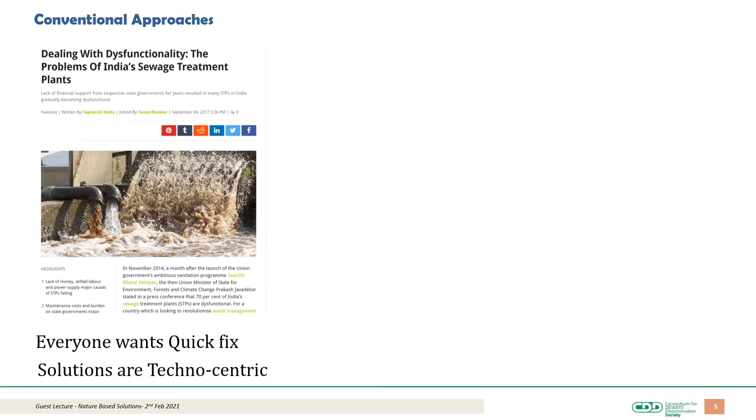In most cases across India and the world, everyone wants a quick fix, which means the solutions are technocentric. When you have solutions that are technocentric, there's a problem of the operation and maintenance being high, which people can't afford. That's a major reason why there are a lot of sewage treatment plants in India that have operational issues and sometimes are not functional at all.

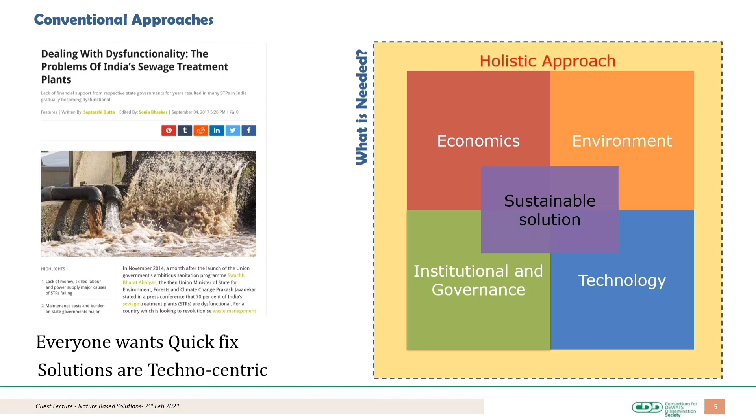So what is actually needed is a sustainable solution with a holistic approach that focuses on economics, environment, institutions and governance, and technology. So this is how we try to approach a program.

Traditionally, gray or hard infrastructure, which means engineering projects that use concrete and steel, has dominated the efforts to reduce and manage impacts from natural disasters and to manage water resources. However, internationally, the focus is now shifting towards nature-based solutions, especially for water resource management, disaster risk reduction, as well as climate change adaptation.

Natural systems have long provided many of the services communities seek from grey infrastructure. NBS, which we call nature-based solutions or nature-based infrastructure, is an approach that uses natural systems to provide critical services. One example is wetlands for flood management, or mangroves that reduce the impact of waves, storm surge, and coastal erosion.

These solutions can also synergize with grey infrastructure, forming what is called a hybrid solution. So this nature-based system can provide a cost-effective and flexible approach, especially for disaster risk and water resource management.

Today we're going to look at how NBS systems can be integrated into water body rejuvenation, especially in the urban context. We will not just focus on wastewater treatment, but also focus more on wetland treatment systems and the lakes. We'll also see two videos of how a water body is rejuvenated in an urban context: one is the rejuvenation of Mahadevapura Lake in Bangalore, and we'll also look at canal rejuvenation in Alappuzha.

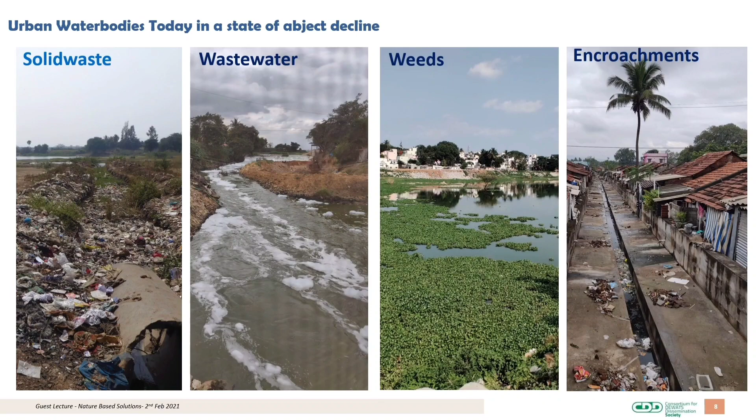The lake used to provide various services such as flood management, biodiversity enhancement, microclimate benefits, livelihood, especially fishing, and they also used to provide water security by recharging the ground. But now it's all lost due to the conditions these lakes have been brought into.

Wetlands have properties that make them unique among the major ecosystem groups on the earth. They have a higher rate of biological activity than most ecosystems. They can transform many common pollutants that occur in conventional wastewaters into harmless byproducts, making the water quality better. In water body rejuvenation, we are trying to mimic that. We are implementing what we call treatment wetlands, and we use them as tertiary treatment units to remove organics and nutrients.

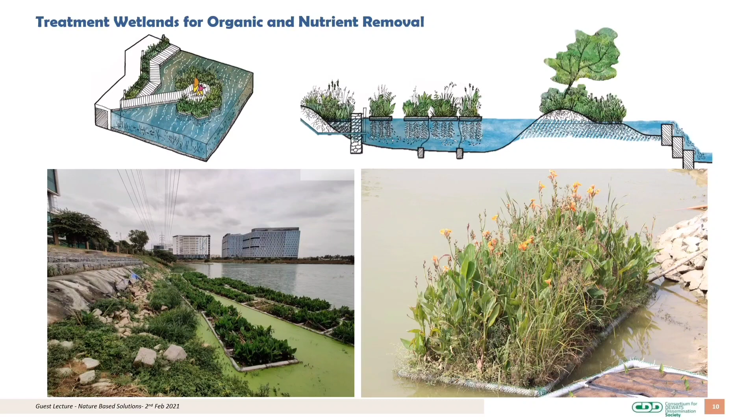The previous example that you saw was a floating wetland, but we have similar wetlands called free surface flow wetlands, which are very similar to natural wetlands. Here the plants are rooted to the soil, and the water is allowed to pass through them with a certain retention time. It's been designed for a retention time of say 2 to 3 days. These wetlands not only treat wastewater but also reduce silting in lakes, and nearly 40 to 60% of the biodiversity of the lake lives in the wetland areas.

And since they have a high biological activity, the CO2 absorption is more and helps in reducing greenhouse gas emissions. And also I feel that we have to convert nearly 10 to 15% of all the lake area into wetlands. The pic you see here is the Periyakulam Lake in Coimbatore, which is being rejuvenated under the Smart City program. CDD Society has planned these wetlands, and nearly about 30% of the lake area has been converted into wetlands here. And especially these wetlands have been implemented as a part of biodiversity enhancement, as well as tertiary treatment of the wastewater.

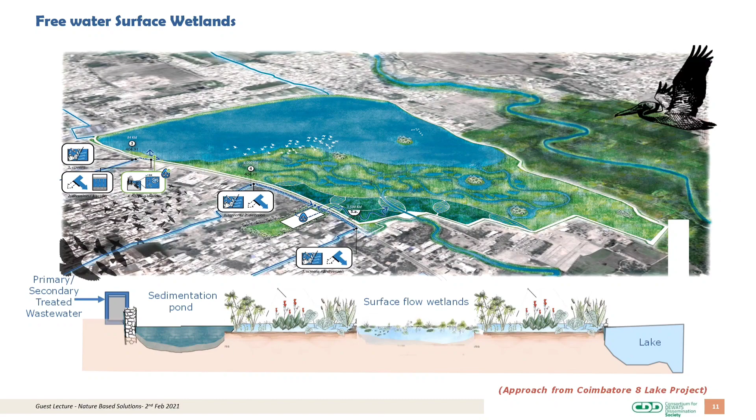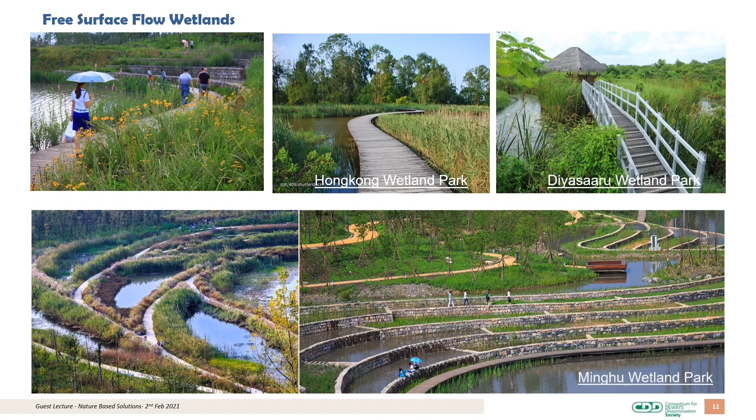In an urban context, getting back the wetlands in cities might be difficult. But you can see here various examples of how we can integrate landscapes in wetlands and promote public awareness on wetlands, especially through tourism, and there are various examples like Hongkong Wetland Park, Minghu Wetland Park, and Diyasaaru Wetland Park, which will be a recreation, but also bring the wetlands back into the cities too.

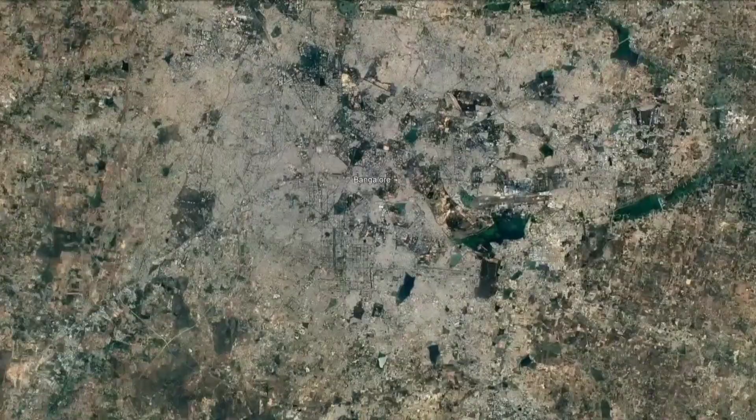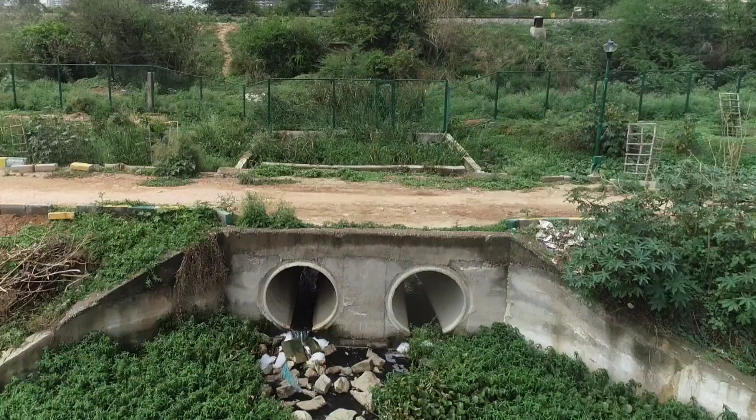Bangalore city has got more than 200 live lakes, and all these lakes have been polluted and have been receiving sewage. So we have been taking up rejuvenation. In some of the lakes we are getting help from NGOs and corporate companies also. For example, Mahadevapura Lake, which is around 26-27 acres. The major contributor for this rejuvenation is United Way and some of the corporate companies. And the technical consultant is CDD. Whatever budget we had in BBMP was very limited, so we had to approach United Way.

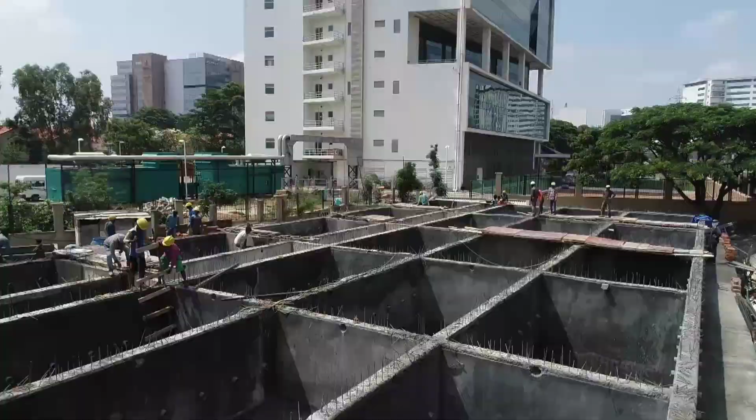United Way has been working in close to about 20-22 lakes in the last 7-8 years. And United Way's roles and responsibilities would be restricted to enhancing the biodiversity of the water bodies, making the lakes more community friendly. One of the key areas where we work is to see how the corporate social responsibility funds which are available can be directed towards rejuvenating the lakes.

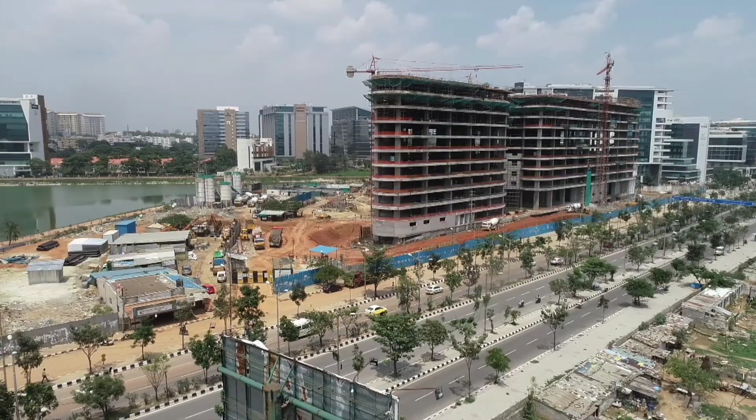We decided that we will take up Mahadevapura Lake, which is abutting the Bagmane Tech Park on the outer ring road of Bangalore, with the help of a couple of corporate partners like Mphasis, who actually triggered the idea, Amazon, Dell, Cisco, all of us coming together and saying okay, let's see what can be done. So the key reason for us to look at Mahadevpura was that we were present in Bagmane Tech Park, which is right next to Mahadevapura Lake.

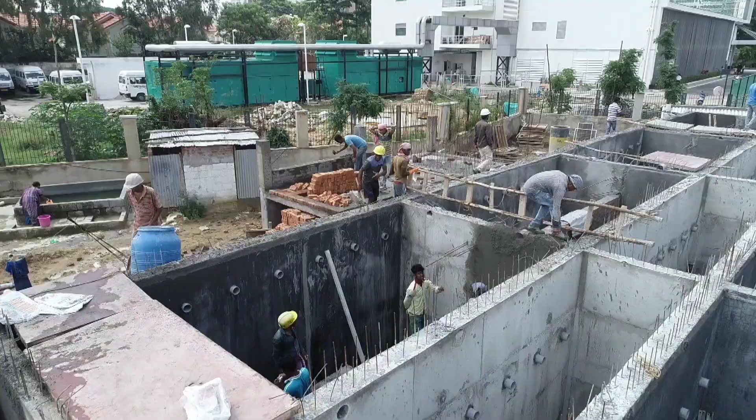I must acknowledge the support that we received from other corporates like Amazon, Cisco and Dell, who also came forward and took ownership as a community of corporates to engage with this and to adopt this lake and set up the STP plant. It's an example of collaboration. When it comes to environment, these four companies are showing the way to a lot of other companies.

When we were scouting for a very reliable partner in the whole journey, we figured out that it was a pleasure meeting the CDD team. When they came to us, we went about it quite systematically. We understood the objectives of the project to replenish the lake and keep it full throughout the year, leading to groundwater recharge benefits and microclimate benefits and improving the overall aesthetics of the place.

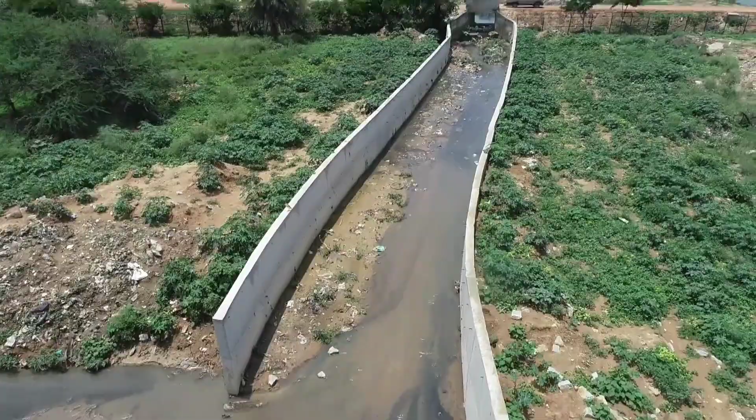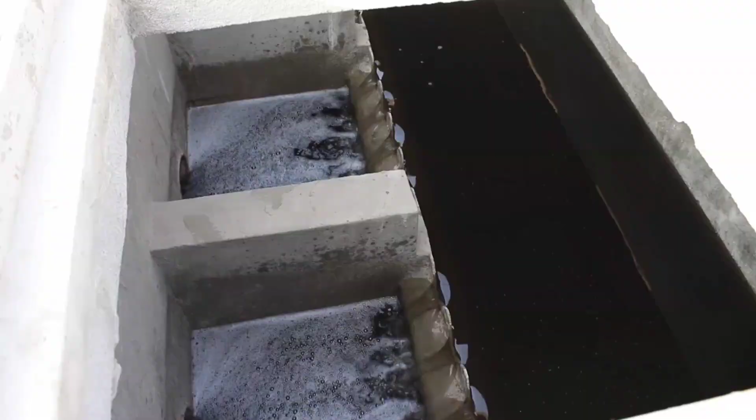Our job was to freeze the capacity of the plant, choose the inlet from which we would draw the wastewater, and also collect all the data required to carry on with the overall process design. We are expecting three major outcomes from this initiative. One is improved green cover, improved biodiversity of flora and fauna, increased involvement of the key stakeholders, especially community taking interest in maintaining it in the long run. And third most important is also improvement in the quality of water that goes into the lake.

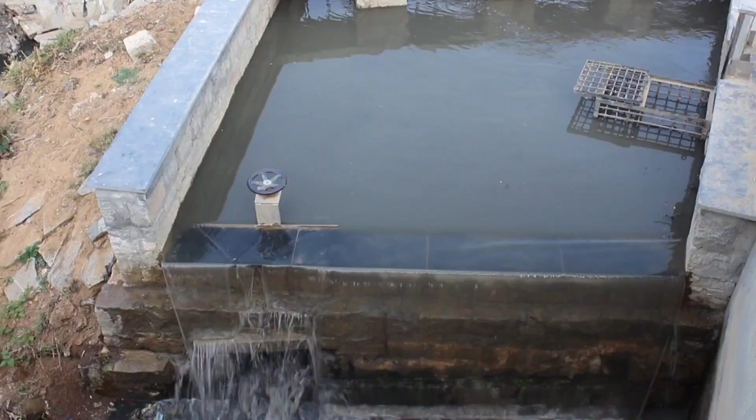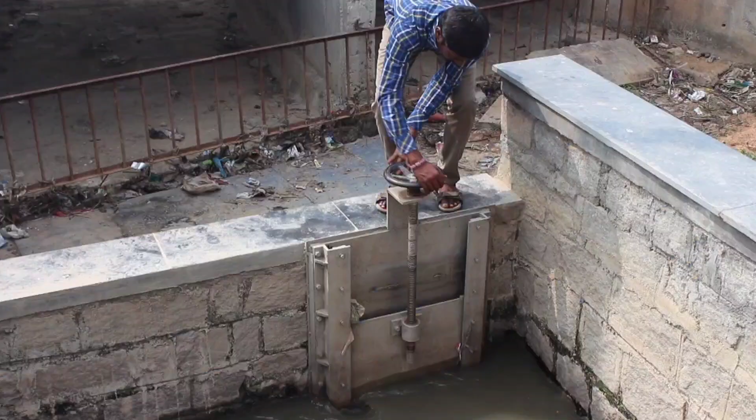The treatment process is called DEWATS, which is CDD's approach to decentralized wastewater treatment. It is primarily an anaerobic treatment system with an aerobic kind of post-treatment module, and in this case that module is gabions and floating wetlands. What is unique about this process is it's very low on energy consumption. It doesn't require any process energy. It is very low on operator skill requirement. It's a low maintenance kind of system. It is also very robust in the sense that it can take fairly good variations in inflow volume as well as inflow quality.

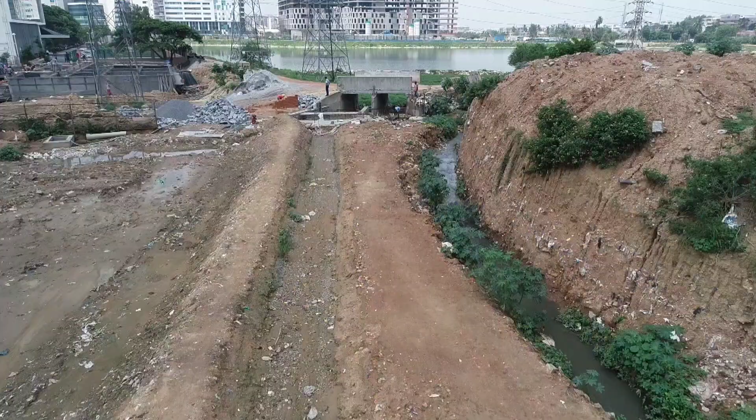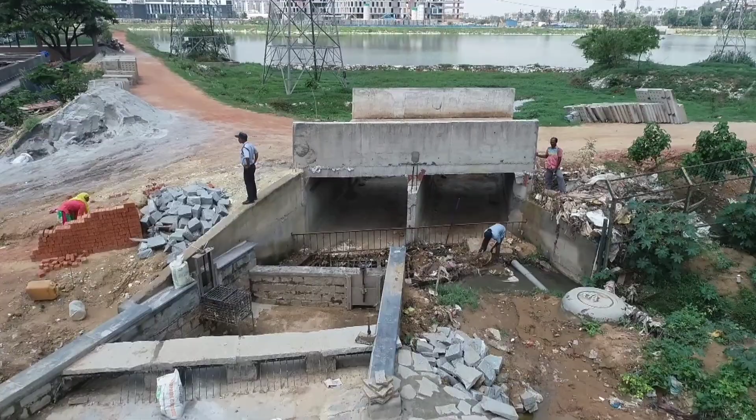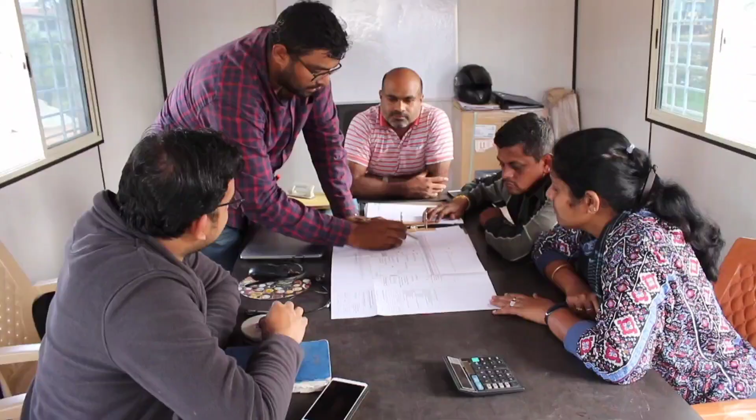So the major challenge in this project was to actually construct the intake and diversion structure because we are dealing with a live drain where there was continuous wastewater inflow. So we had to create a temporary diversion drain. We also had to integrate this diversion structure with existing structure in the lake. And there was one more surprise that was thrown up when we started working. We realized that there is a sewage line broken right at the inlet of the lake, and we were asked by BBMP to see if we can integrate that into our project, and we did that integration as more of an unforeseen intervention.

Other big challenge on this project was that we had early onset of monsoons. In the month of March we had some heavy showers because of which there was some breach of the earthen structures. We had to rebuild that and all of that. The coming of large number of these migratory birds, a very robust aquatic life in the water are all indications to say that the project is definitely showing all the success which we had anticipated.

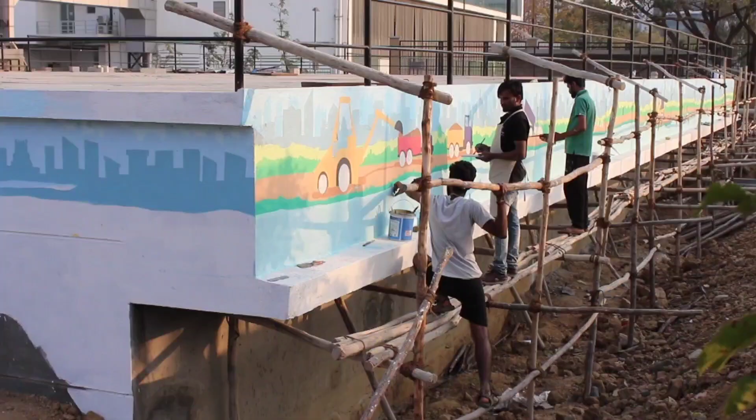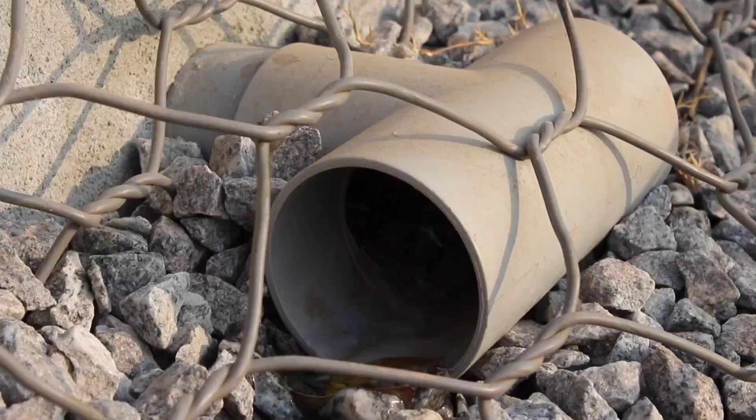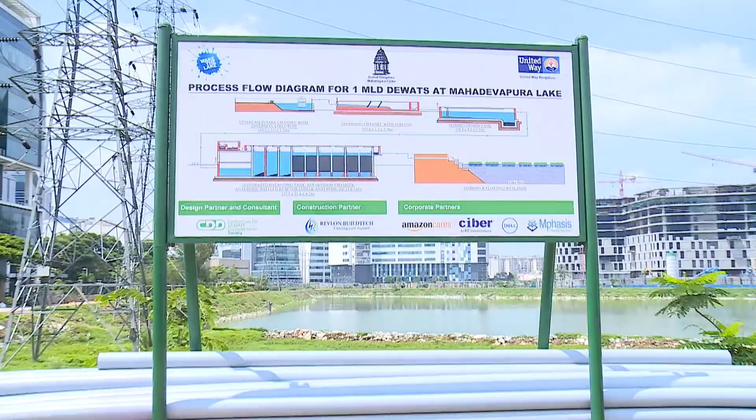The project also envisages operations, and the whole design build operate model is really what has been followed, with a lot of flexibility that comes with CSR financing. If this project does well, it would become a very good example for a lot of others to follow. When it gets completed, it would be first of its kind, a 1 million liters per day sewage treatment plant which is getting installed in the city. We sincerely, truly appreciate the partnership with all the stakeholders who have come together to make this project a success.

If you look at Mahadevapura Lake, there you had some land available at the mouth of the inlet, and we could build a treatment system there and put the treated wastewater into the lake. But here, if you see in Alappuzha, there are a lot of series of interconnected canals, and you have in the left the Arabian Sea, and in the right you have the rivers and the Vembanad Lake, and there are series of interconnected canals, and the behavioral pattern is sometimes also complex to understand.

And since it's in the heart of the city, the major problem was the wastewater discharged from these households used to end up in these two canals, polluting, creating mass of the weeds, the water hyacinth. So every 6 months, the municipality used to remove these weeds, but in the next 6 months the weeds used to come back. So looking at the source, we tried to identify what is the source of this issue. So the source was the wastewater from these settlements.

So what we did here is try to select a subdrain as a pilot model, and treat the wastewater at the source itself before letting it into the canal. So here also we plan to implement floating wetlands as part of the rejuvenation project, and this is one of the most successful projects that you could see, and I would request everyone to see this video.

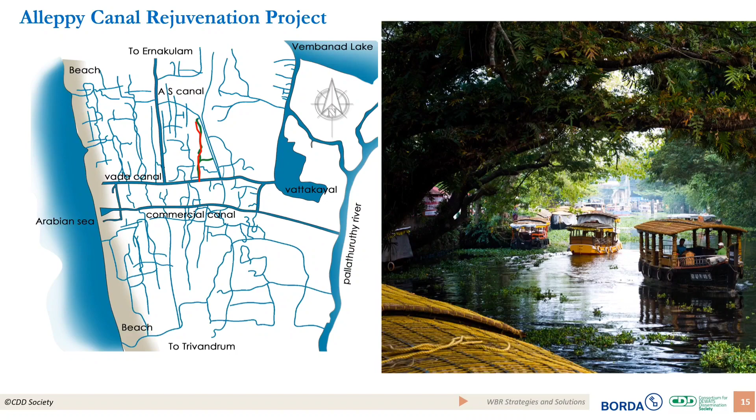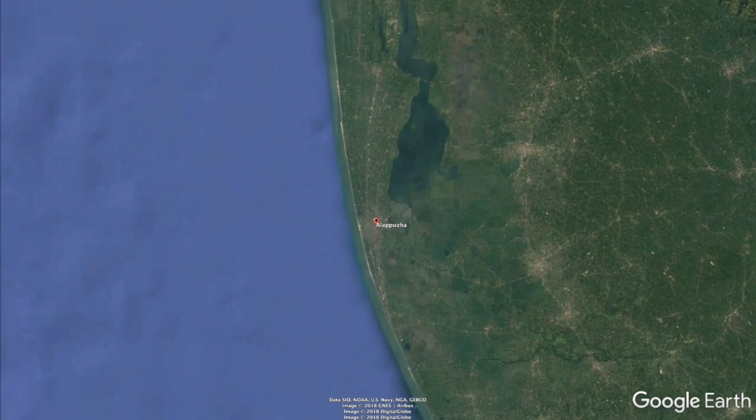Rejuvenation of the canal network of Alappuzha. Dotting the coastline of the Arabian Sea in Kerala, India, the quaint town of Alappuzha has often been described as the Venice of the East, with its picturesque canals, backwaters, beaches and lagoons. As the oldest planned backwater town of Kerala, Alappuzha's main waterways, which link the Arabian Sea on the west to the Vembanad Lake on the east, were once its nerve centers.

Unfortunately, with the port losing its commercial importance, road networks and automobiles getting more prominence, Alappuzha's canal network slowly started losing its purpose. Today the canals have been reduced to easy waste dumping spaces, a cause for major pollution, health concerns and poor aesthetics. In late 2017, on advice of the state leadership, KILA and IIT Bombay organized the winter school to study and suggest the methodology to address the rejuvenation of the canal network.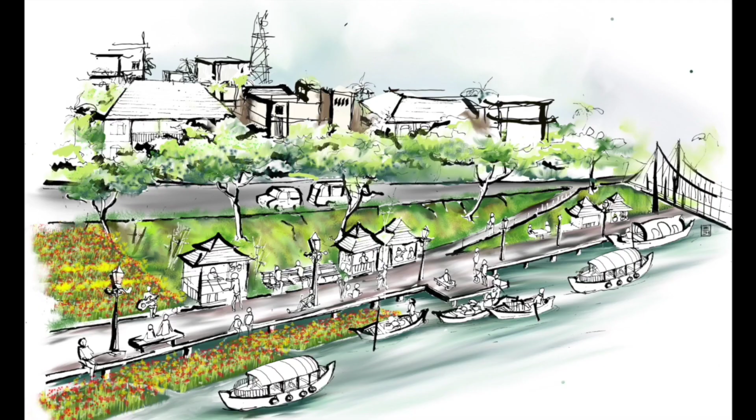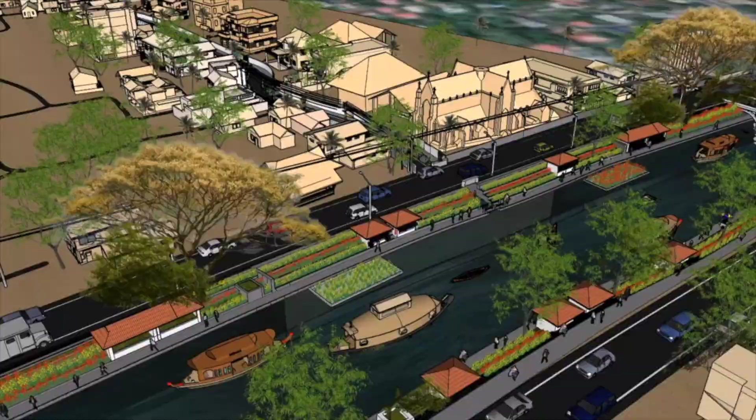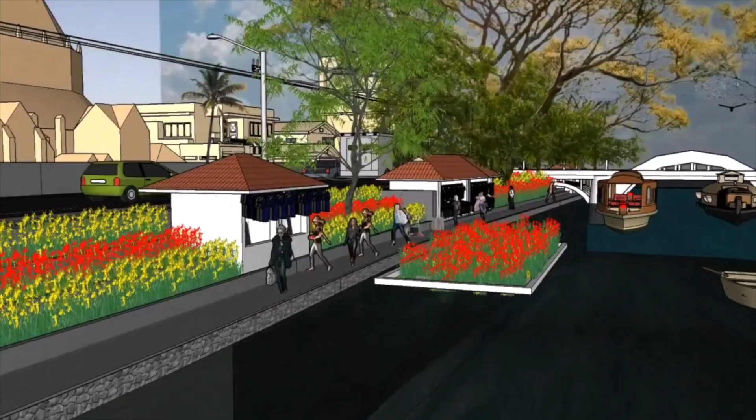The team brought in CDD Society of India, CUSAT, and Inspiration Kochi, who sat together and drew up a vision to rejuvenate Alappuzha's lifeline. A vision to clean and rejuvenate its 14 canal sheds, set in position liquid and solid waste treatment systems for over 40,000 households and buildings, create over 10 km of green pedestrian walkways, bringing back vibrant life on the water's edge, move towards an efficient water transport network, and in the process create several thousand green jobs for a range of skilled as well as unskilled labor.

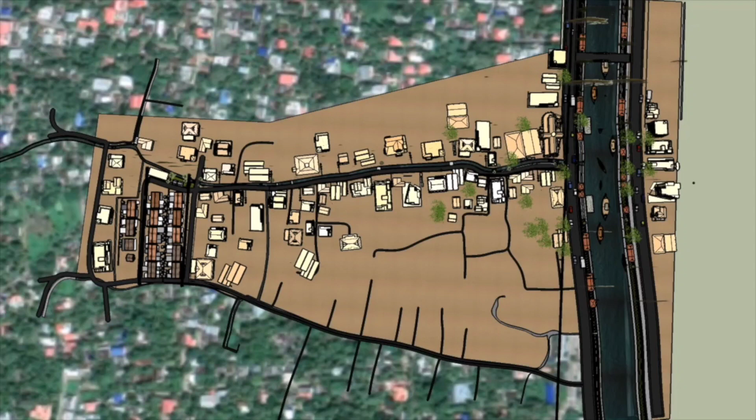And if this approach we have adopted in Alappuzha, which is the philosophical base of this project, succeeds, we will have created a model for the whole world. As a first step towards realizing this dream, the team has launched work on a pilot project taking 400 meters of a sub-canal. The project is guided by enthusiastic support of all related government departments and the political leadership cutting across party lines. The stretch is home to around 100 individual houses, 48 households who live in the municipal colony, and a few commercial establishments and institutions.

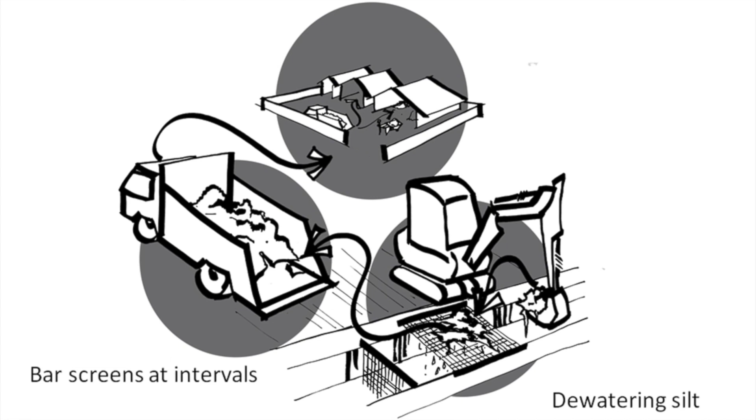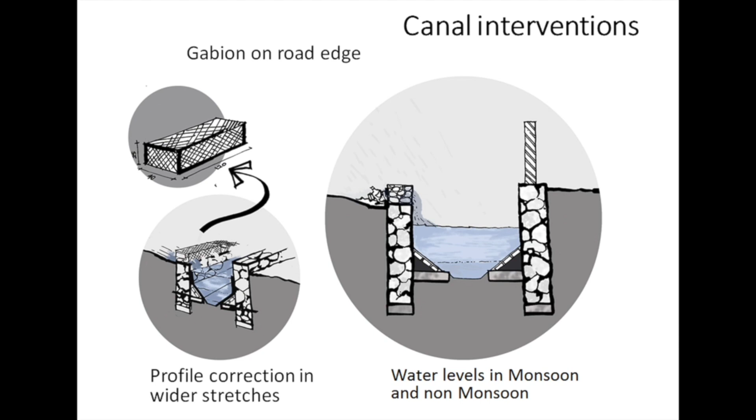The approach adopted emphasizes decentralized, at-source treatment of the pollution with active participation from the community. These include cleaning, desilting, and providing screens at regular intervals to discourage further dumping of waste. The screens shall also help as a tool to define local canal committees. The bed profile of the canal shall be shaped to improve flow. For the municipal colony, a community of 48 economically weak households, the project shall address the sanitation shortfall together with providing an on-site decentralized wastewater treatment system.

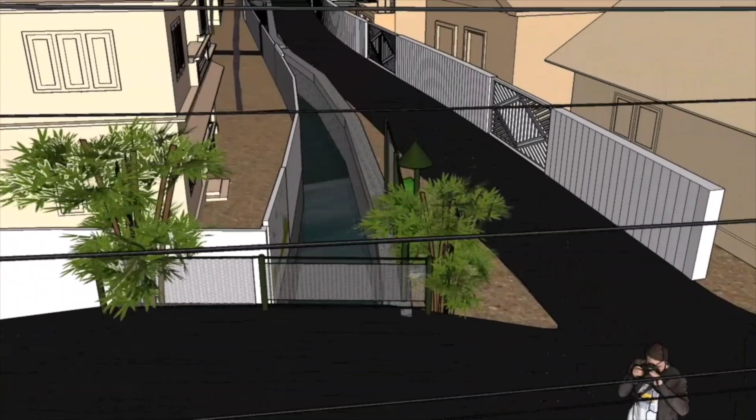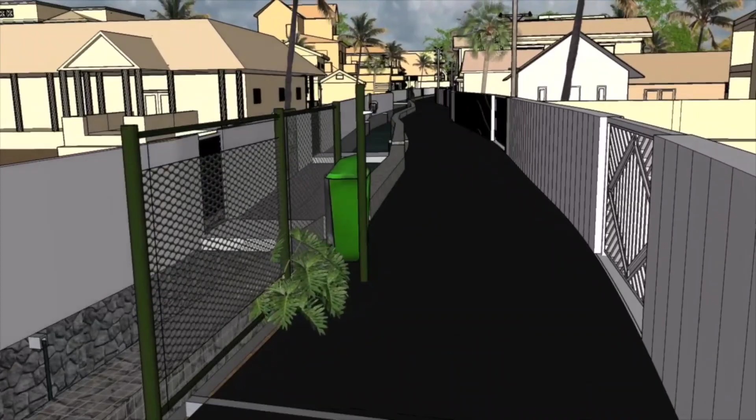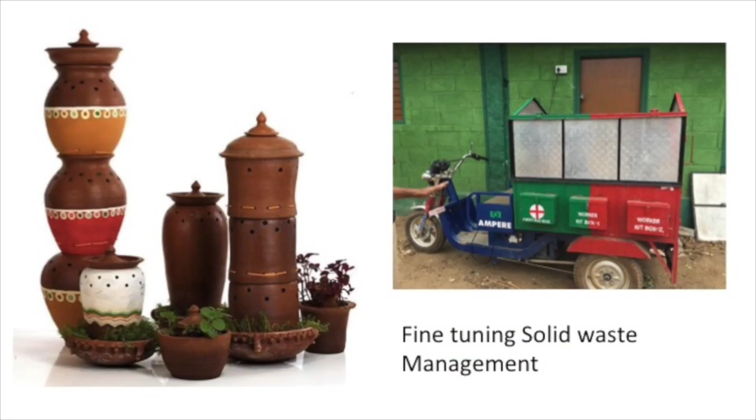25 volunteer households shall be provided with separate at-source treatment systems for black and grey water. This will help evolve policy decisions for the entire town with a combination of incentives, soft loans and regulations. Policies shall be strictly enforced to ensure that the hotspots in the private sector set up their own treatment systems and let off treated water only as per discharge norms. The present solid waste management shall be fine-tuned. Biodegradables will be treated at source, non-biodegradables collected at community level to discourage dumping into the canals.

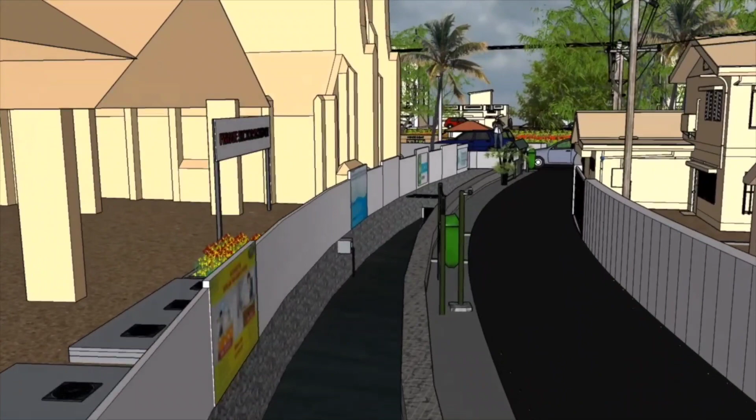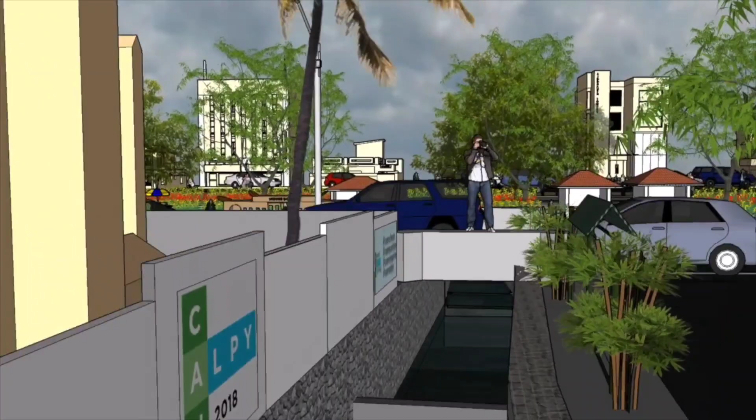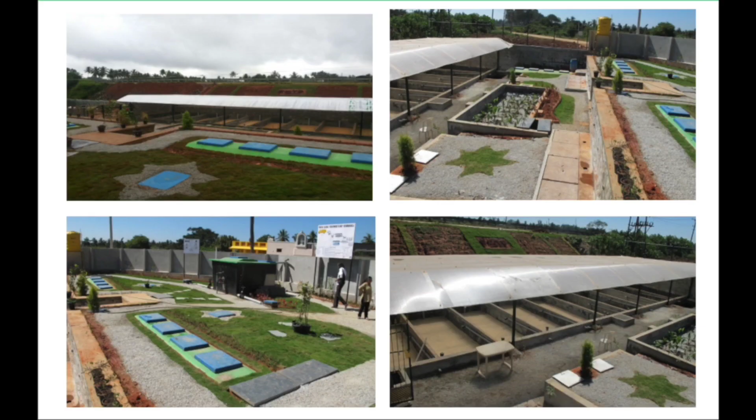The canal banks shall be made attractive and accessible as green walkways with good lighting, paving, dustbins and motivational graffiti. With these interventions at source, the quality of water in the sub-canal shall improve considerably when it discharges into the main canal. Here, there shall be constructed wetlands, phytorids and floating wetlands to further improve its quality. The project shall also initiate setting up the first fecal sludge treatment plant at the city level.

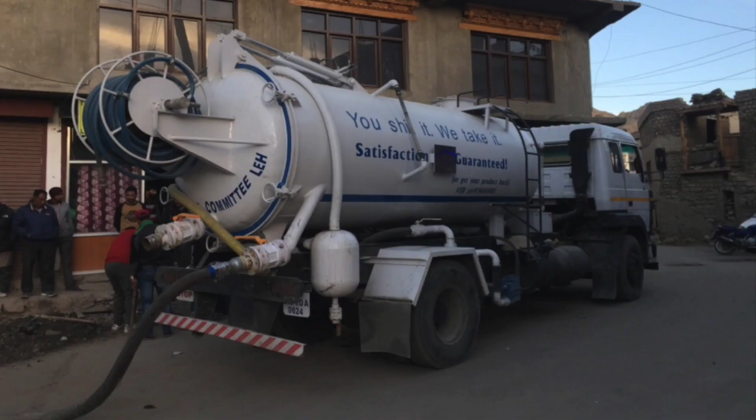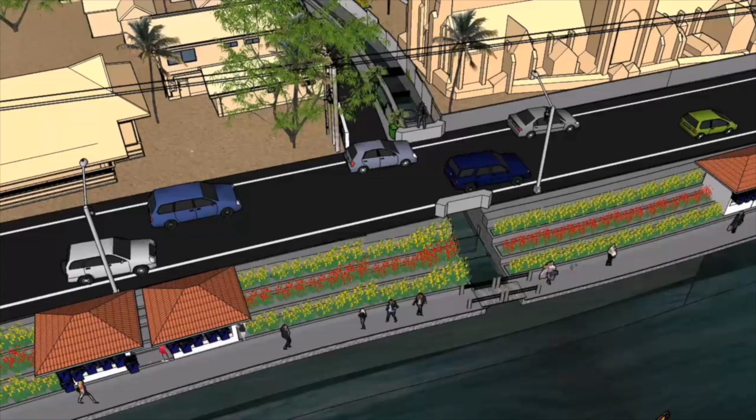The awareness campaign, Thodu Odayalla, Canals are not drains, to raise awareness and garner public participation has already been launched all over the town. Further, the canal committees shall be trained and equipped for maintenance of the systems for a year, after which they shall take over as the custodians of their natural heritage pride. May 2018 saw over 300 students from all over the country attending the summer school focused on a unique participative documentation and discussions on the challenges of scaling up. Adopting such a decentralized participative approach, Alappuzha aspires to rejuvenate and restore its network of canals, a role model not just for our country but even to the world.

There are a lot of challenges, especially with these nature-based solutions or interventions which use nature and natural functions of healthy ecosystems to tackle some of the most pressing challenges of our time. These types of solutions help protect the environment but also provide numerous economic and social benefits. Even though there are many people who design these systems, the on-ground implementation of these solutions poses a challenge as there is a huge execution gap. The current nature-based solutions implemented on ground are usually of a smaller scale, and there are not many potential players in India for larger scale implementation of these designed solutions.